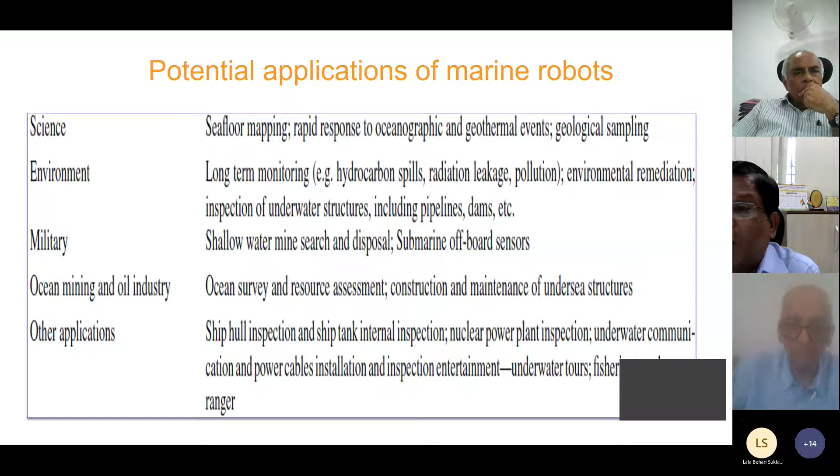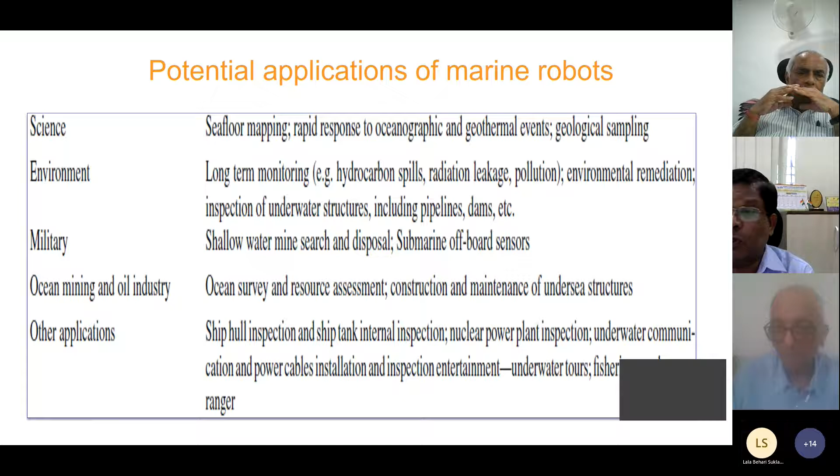There are several military applications, including shallow water mine search and disposal, and submarine offboard sensors. In the mining and oil industry, we have ocean survey, resource assessment, construction and maintenance of undersea structures. Other applications include ship hull inspection, tank internal inspection, nuclear power plant inspection, underwater communication and power cable installation and inspection, and also underwater tours and fisheries. With so many applications, the interest from the control, communication and robotics community is growing to focus research on this area.

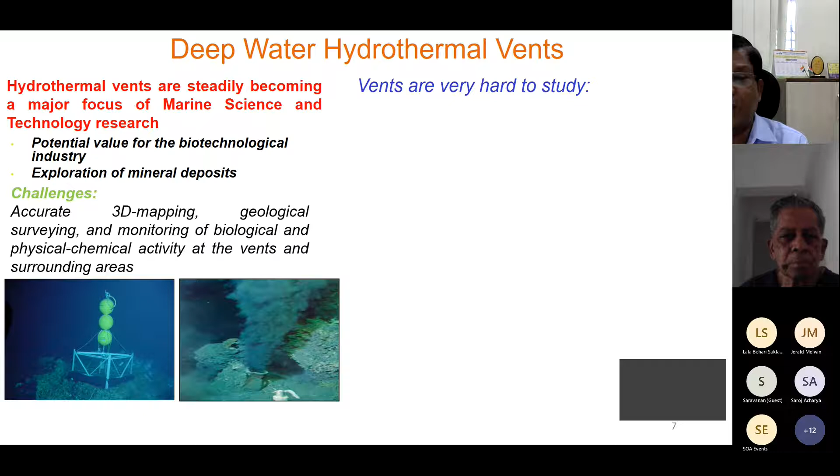But there are certain challenges in this study. For example, how we can map them accurately, how you can pursue the geological survey, and how to monitor the biological and physical-chemical activity at the vent and surrounding areas, and therefore it is a difficult task. If you look at the brine, there are a lot of processes that can happen.

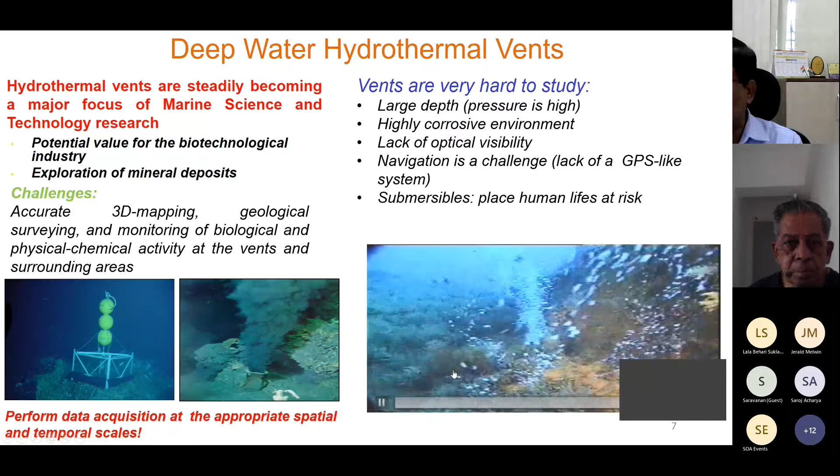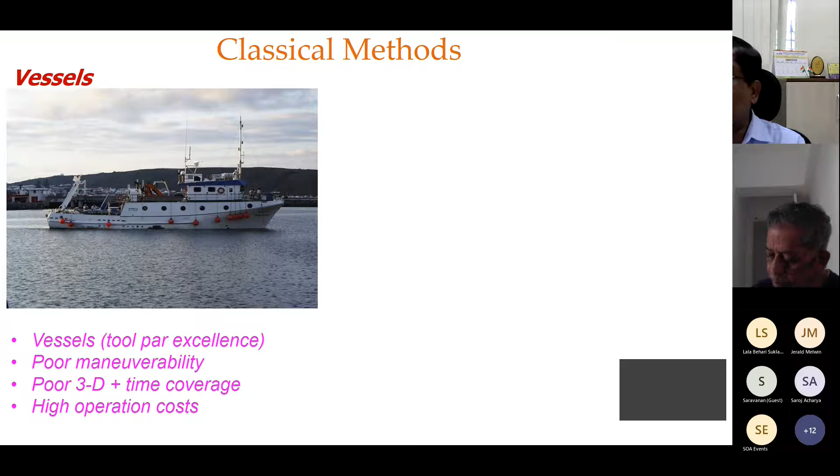And the other aspect is to collect the bacteria, the study on the bacteria, and also gas collection, and to know the details about the gas bubbles. So these are some of the activities of interest at the vents. So usually this is done using marine vessels. But as you know, these marine vessels have poor maneuverability, the coverage is less, and they involve high operational cost.

On the other hand, we deploy divers for the purpose. But as you know, divers are also restricted. They have restricted coverage, it sometimes becomes dangerous, and it becomes difficult to collect georeferenced data through the divers. So therefore, there are a lot of technical challenges for these tasks, and particularly we need to study the sensors and methods that we want to develop for marine data acquisition, signal processing and data fusion, and how to disseminate this information.

So therefore, there is a need for advanced technology, and that technology involves how to employ autonomous underwater vehicles, autonomous surface vehicles, gliders, submersibles, or vessels for these tasks. So after these vessels, slowly the movement happened to develop remotely operated vehicles. But these remotely operated vehicles have an umbilical cord, so they are not truly autonomous.

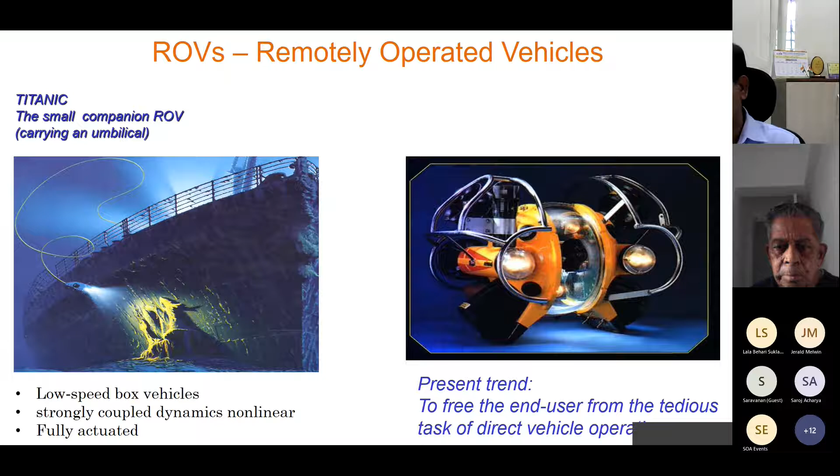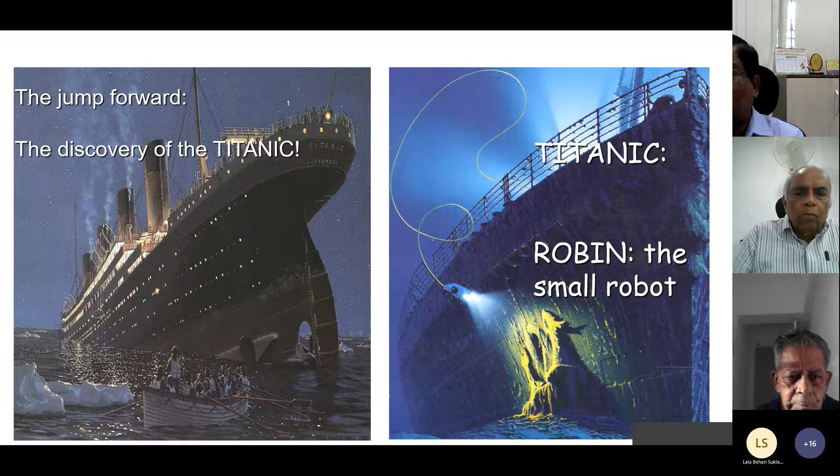So you can control them from somewhere else, and it is fully actuated, meaning the number of degrees to control and the number of actuators involved are exactly the same. So all the degrees of freedom are easily controlled. So it is easy, but still not autonomous, and it is very tedious to control them remotely. So the next step is how to remove this control from outside and make it truly autonomous. So the new trend is to develop autonomous underwater vehicles, where we want to remove this umbilical cord of the remotely operated vehicles.

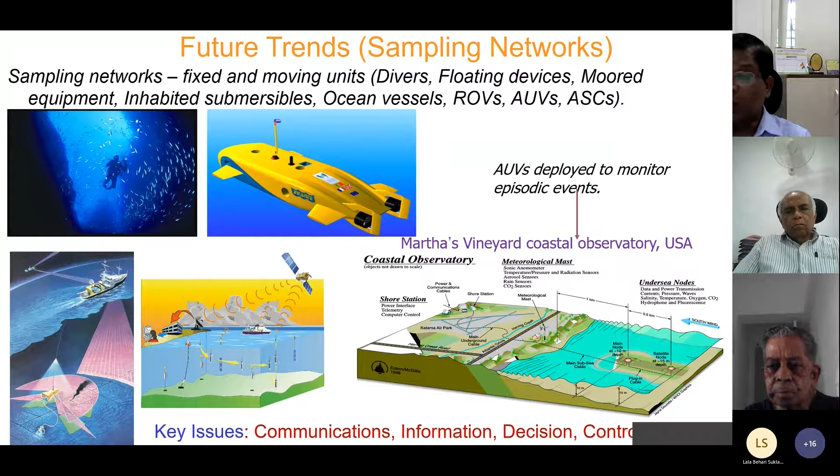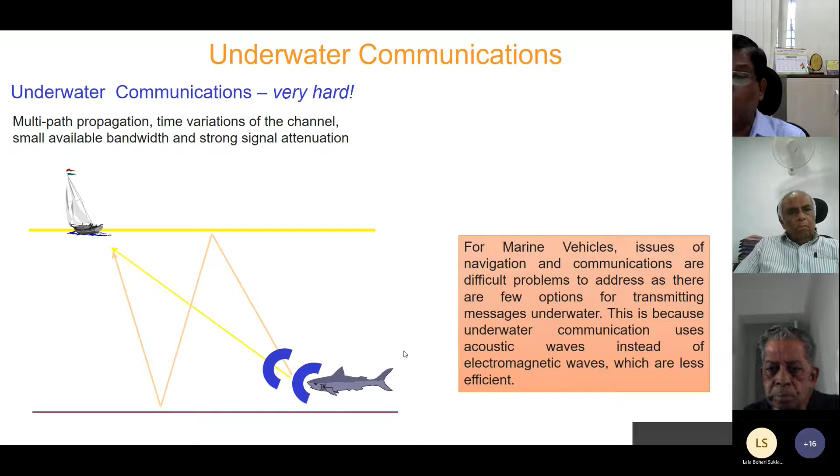So the communication, why it is an issue: as you know, in the underwater medium communication is very difficult because of the multipath propagation, the time variation of the channel, the low bandwidth and the low data rate. So therefore, for marine vehicles, the issue of navigation and communication is difficult to address. So when we design a control, we must look into these communication aspects.

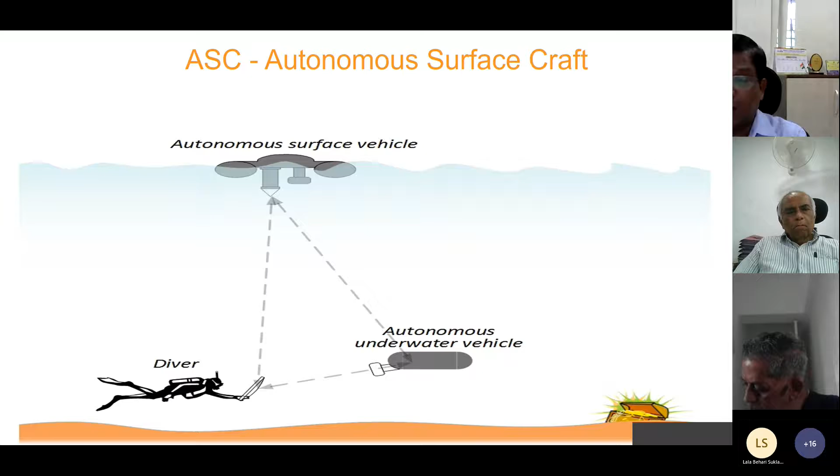So as far as the future vision for these marine vehicles is concerned, like the autonomous underwater vehicle, we can put the surface vehicle along with the underwater vehicle and diver in a complete loop. So what we can do is set up a symbiotic link between the human diver and a set of autonomous robots, the underwater vehicles or the surface vehicles. Now we can develop a multi-component, highly cognitive robotic system that can easily gather the data and interpret the data, and we can use it substantially at a later stage.

So now the key motivation is how we can ensure the diver safety and how we can achieve the underwater operation, and we can also go for several missions like the surveying of the seabed or some of the underwater mission plans.

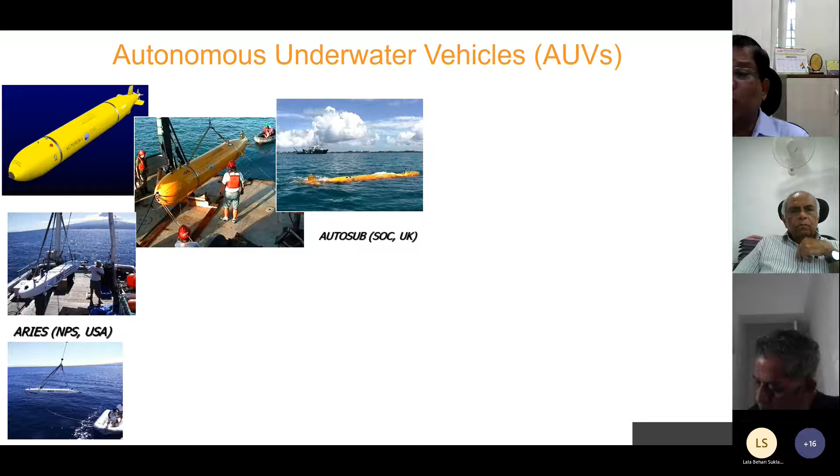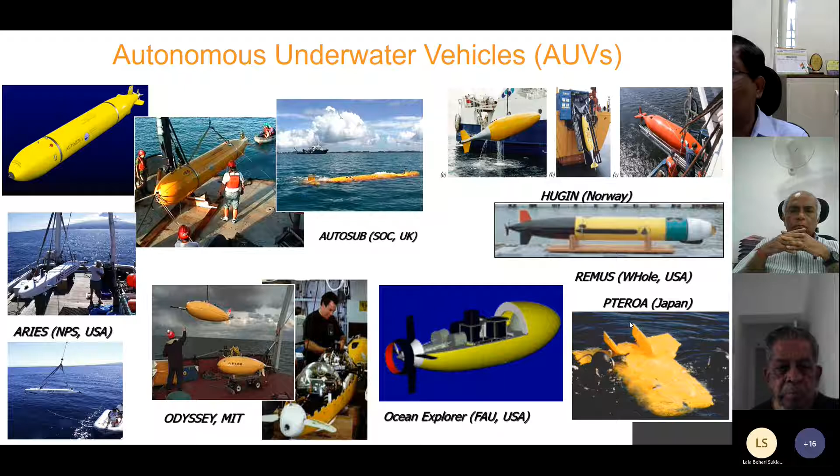So for autonomous underwater vehicles, a lot of research has happened in recent years. As you can see, this is the development in the US, this is ARIES, and this is MIT. They have developed an underwater vehicle called Odyssey, and this is again by the US. In the UK this is Autosub, and in Norway they are developing a lot of underwater vehicles, called Hugin. Then this is Remus, again in the US, this is the PTEROA in Japan, and this is the Marius AUV, developed again in the US.

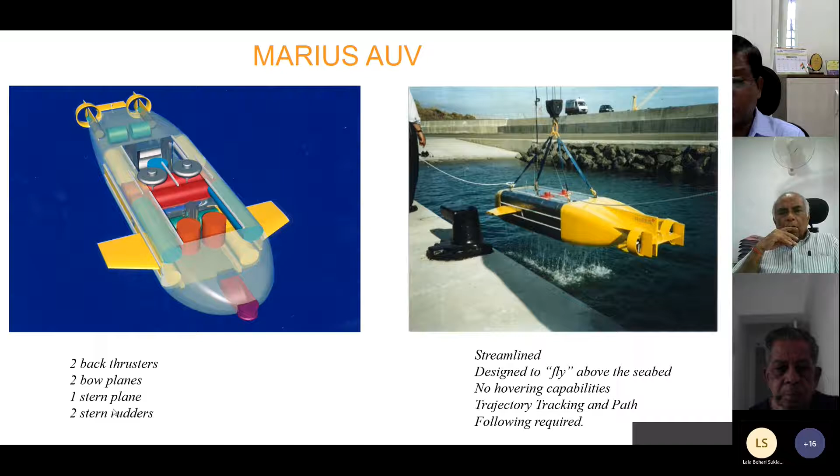And in India we have a couple of systems developed: CMERI Durgapur has developed one, in Rourkela we developed two, and in Kharagpur also they are attempting some AUV development. All these AUVs, as you can see, are propelled through thrusters, and they are capable of trajectory tracking and path following without any difficulty, because we can have both bow plane as well as stern plane control.

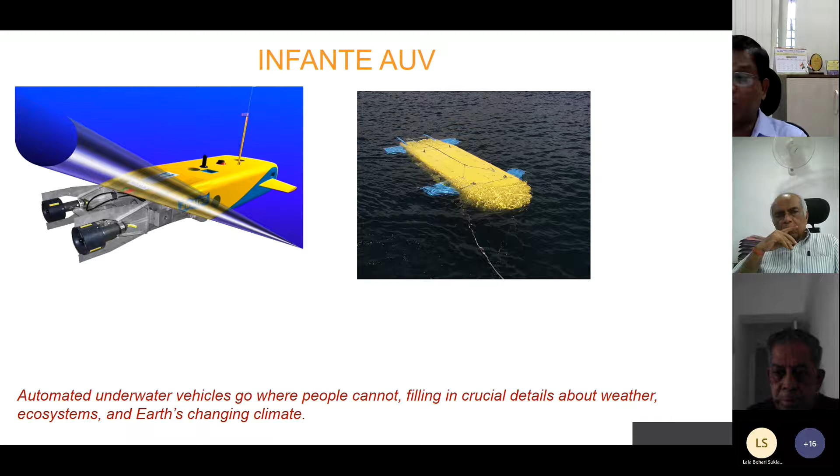So this is a very popular AUV, the autonomous underwater vehicle, which goes wherever people cannot, and we can do a lot of weather data collection and gather other information by using this AUV. These AUVs are supported with thrusters, sterns and rudders, and they are easily controllable for accomplishing a trajectory tracking control or a path following control task.

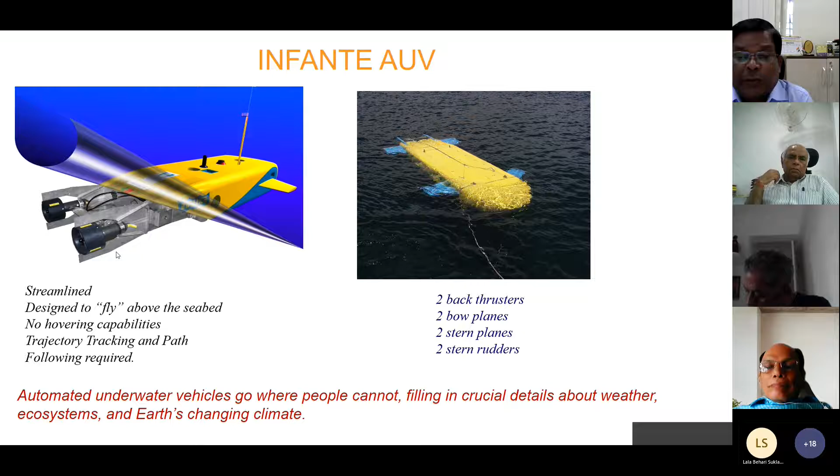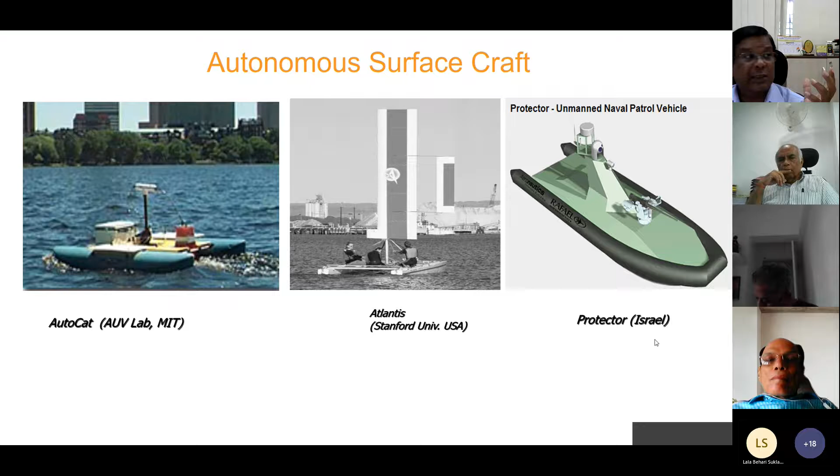This again was developed in the AUV lab at MIT, this is in Stanford, and this is in Israel. So a lot of development has happened in autonomous surface craft and their course control. But the problem here is how to control these surface vehicles, the ASC or autonomous surface crafts. The whole problem is the sea waves, the ocean current, the wind gusts, and therefore a suitable design of the path following control or trajectory control is essential here.

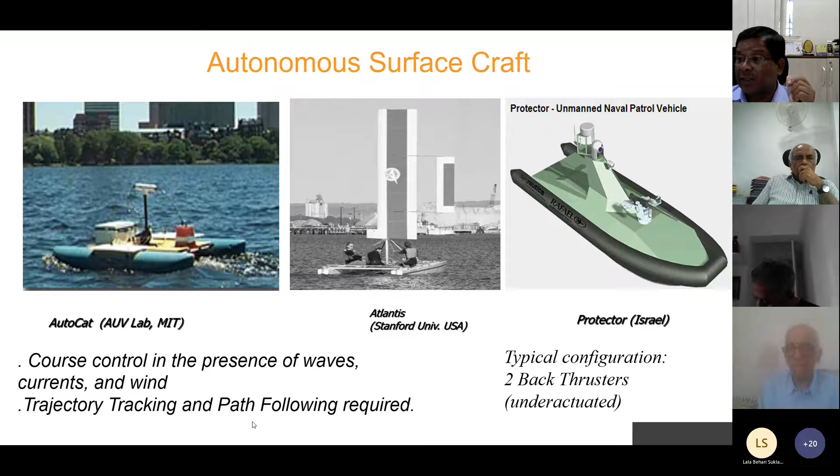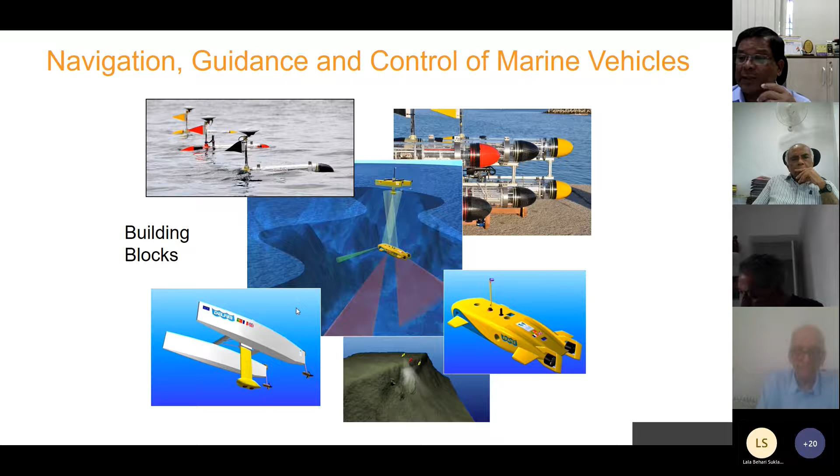As I mentioned earlier, some of the variables of interest are measured using sensors, and wherever it is not possible, we can use observers to design the controller. This navigation task is to direct the marine vehicle by determining its position, attitude, and course, and then figure out how it can navigate.

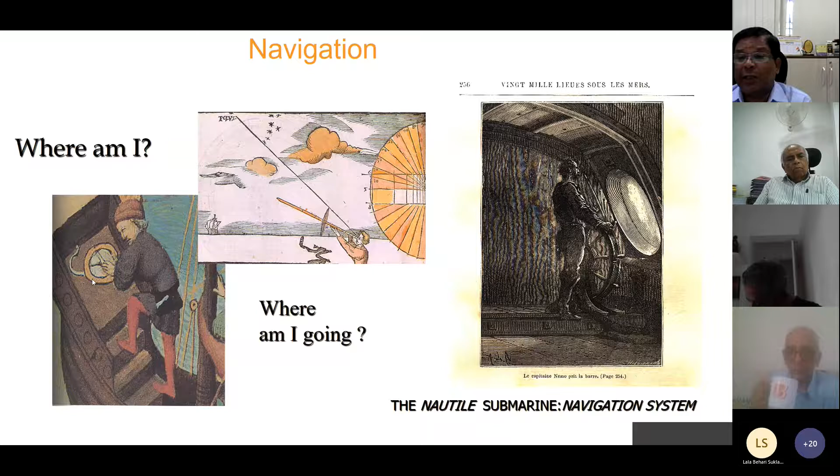So basically, what we understand by navigation is: where am I? Currently I am here, and I should know where I should go. So this aspect is basically navigation.

In terms of these marine vehicles, we have different variables involved, like different linear positions and orientation. We need to know about different transformations of the coordinate frames, like the body reference frame to any other reference frame. So we have to convert it to the kinematics, and then find the suitable control to achieve this desired orientation or desired position.

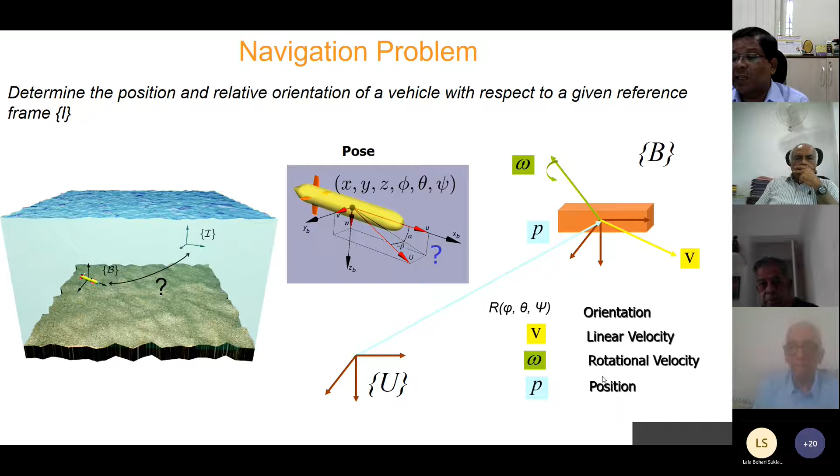So the navigation system needs to be designed using different navigation algorithms, and this necessitates different variables like linear position, linear velocity, orientation, and rotational velocity of the marine vehicles, measured by some sensors for this purpose.

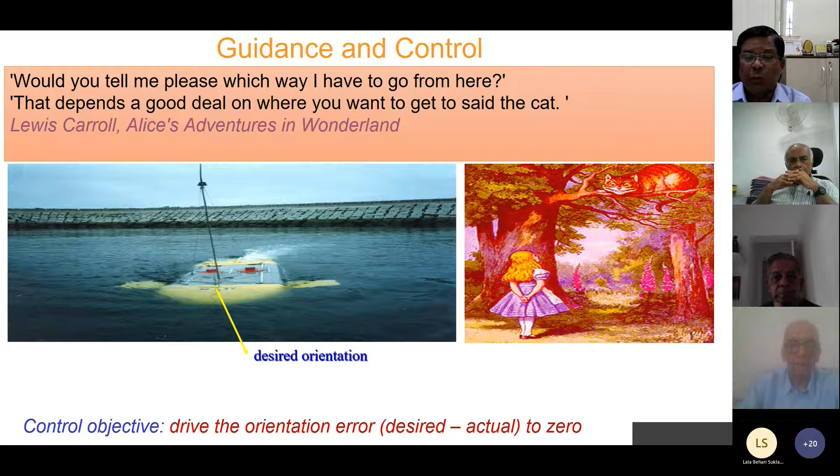So the guidance and control problem: basically we want the desired orientation, and this is the actual orientation. Our objective is that this error, the desired minus actual, should be 0. That is the objective.

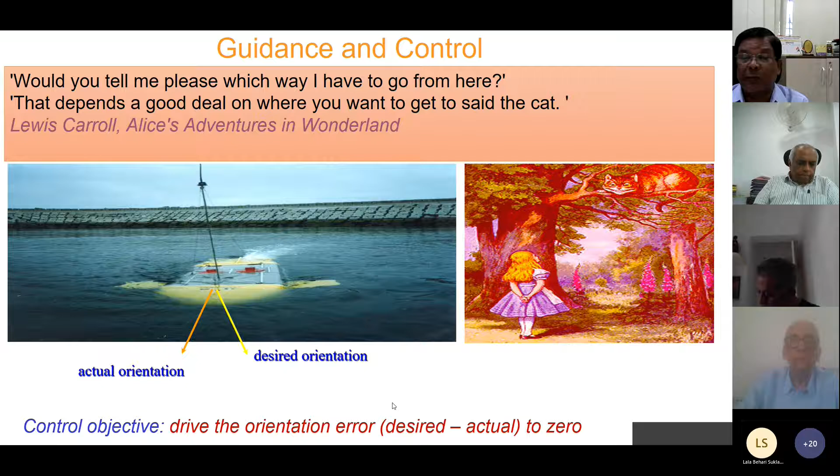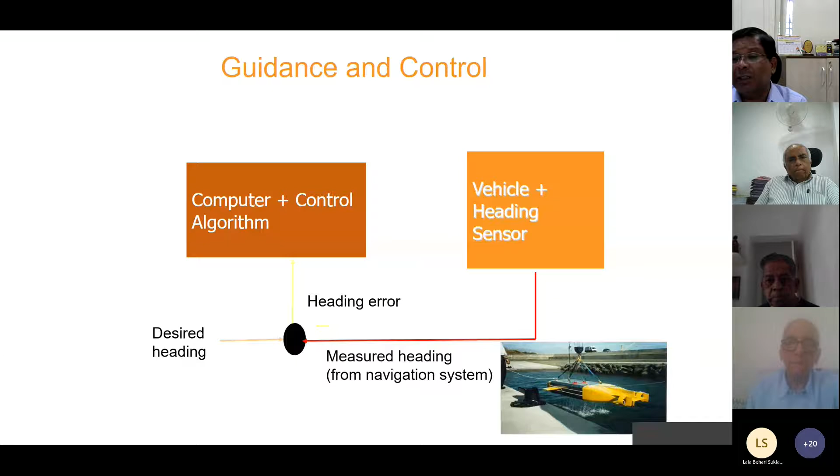So how do you achieve this? That can be achieved by suitable control design. This control algorithm that you design must be put in a digital platform, and then the respective stern or rudder of the marine vehicle would be given the appropriate control signal to change the voltage of this stern or rudder.

Thereby you can control this heading, or for this navigation, you can have either a heading or a diving motion for a particular marine vehicle.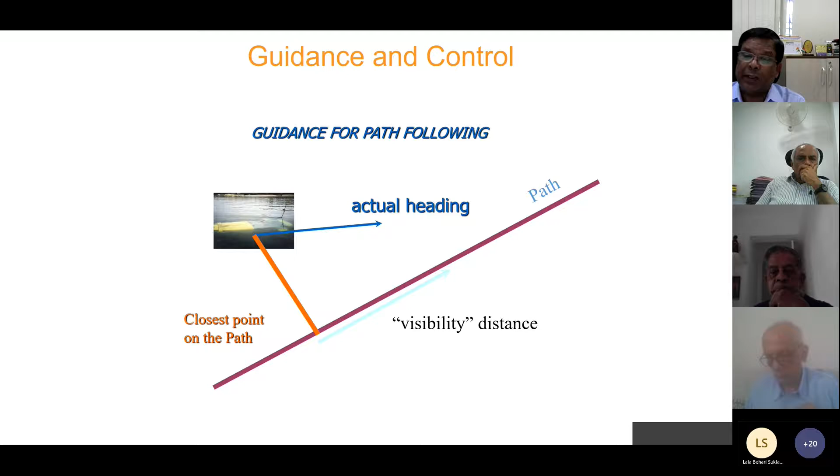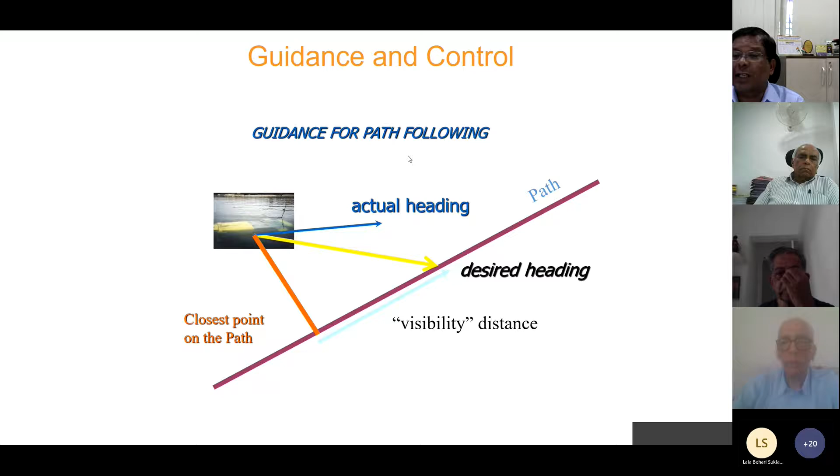So we can have this path following control, meaning it is a single path trajectory control, where the actual path or actual heading is compared to the desired heading. So there is a visibility distance, and the objective is how to achieve this desired heading across the path. We must design a suitable path following control to achieve this.

This mission control for these marine vehicles necessitates different sensors, navigation algorithms, and control, and how to implement them in a computing environment, and then how to generate the appropriate propulsion through the actuators, so that the vehicle can navigate to a desired orientation, a desired path, or a desired heading.

So this is typically an AUV structure if you look at it. The AUV could be propelled either through a thruster or a stern, and this is a very typical figure of an AUV, where this portion is called the nose portion, this portion is called the hull, and this is the tail portion.

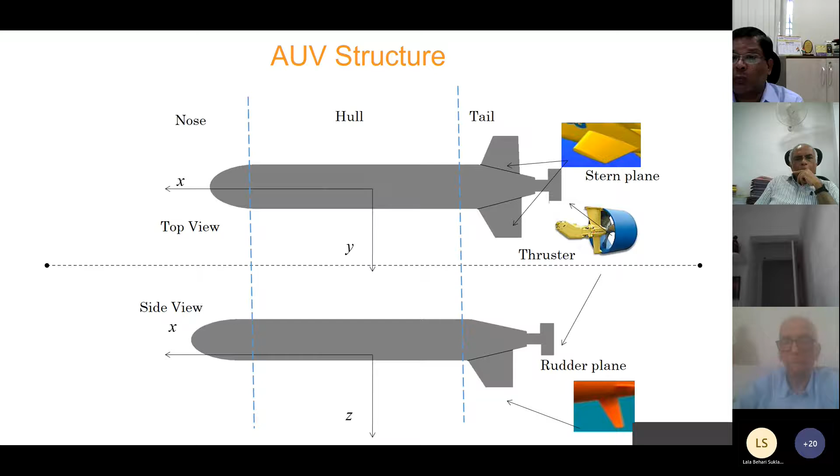So what exactly do we want? We want to control an AUV when there are disturbances, ocean currents, and all these uncertainties present. So how do we design the suitable path following control for an autonomous underwater vehicle?

Therefore we need adaptive controllers, since a fixed gain controller is not appropriate here. So what exactly do we want? We want to develop some adaptive controllers.

As we know, adaptive controllers have gains that are adjusted depending upon the change in dynamics of the plant. So our objective is to design an appropriate adaptive controller so that in case of any uncertainties or disturbances, the controller gains are adapted based on the estimated or identified dynamics at every sampling time. The task is to estimate the plant parameters and states online, and thereby design a control algorithm that facilitates adaptation of the controller gains.

As I mentioned earlier, marine vehicle control has several challenges. The challenge is basically in the communication - the data rate in the underwater medium is very slow, and sometimes there is data loss as well. So we must design a control under this communication constraint, and there is communication delay as well.

So how to take care of that communication delay in designing an appropriate control, and also the disturbances like wave disturbances, and there could also be the dynamics of the AUV or the marine vehicle dynamics to consider.

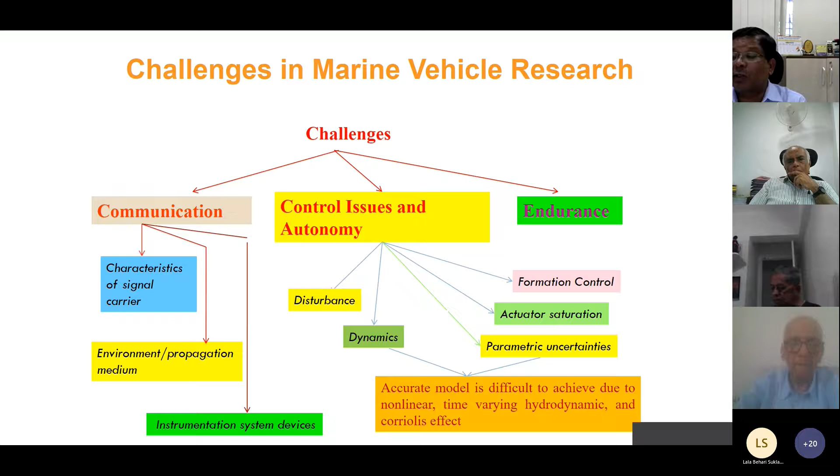There could be some parameter uncertainties and actuator saturation, and this problem becomes more amplified when you employ a larger number of AUVs for difficult applications, and we also need to ensure endurance. So one controller of interest that we designed for this underwater vehicle is an adaptive controller that basically identifies the dynamics of the underwater vehicle.

This is done by modeling the dynamics through a NARMAX model, meaning Nonlinear AutoRegressive Moving Average eXogenous model. Unlike the ARMAX model, here polynomial parameters are involved. Since the autonomous underwater vehicle is a very complex system, its dynamics are truly nonlinear, so we must capture this nonlinear dynamics appropriately.

As discussed earlier, the adaptive controller is implementable when you can know how the dynamics changes at several sampling times. So at every sampling time, we identify the NARMAX dynamics, and thereby design an adaptive controller. The controller we design is a self-tuning controller, which is one class of adaptive controller.

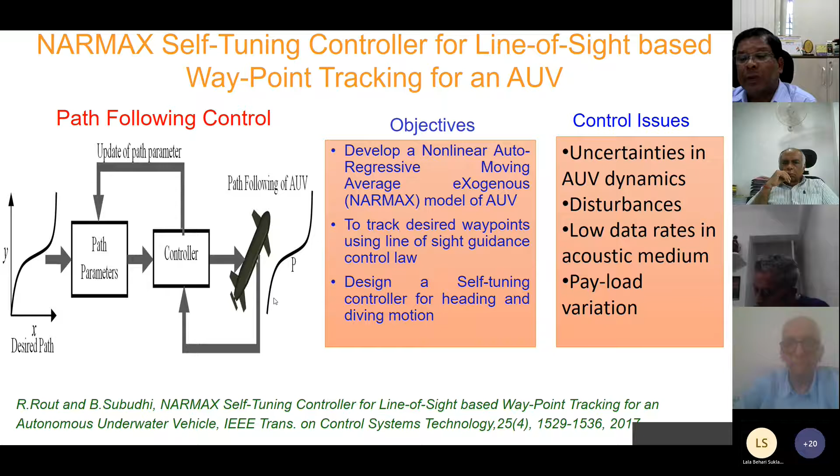The approach we employed is a line-of-sight approach, where we provide a set of waypoints for tracking across a path. The problem for path-following control is that we provide the path information, and our objective is that the underwater vehicle or marine vehicle must follow the desired path. To design that control, we must know the kinematics.

In the kinematics, we have different degrees of freedom, like linear velocities, angular velocities, and orientations. These degrees of freedom include surge, roll, pitch, sway, and heave. We transform these variables from the earth-fixed frame to the body-fixed frame through suitable transformation using matrices J1 and J2.

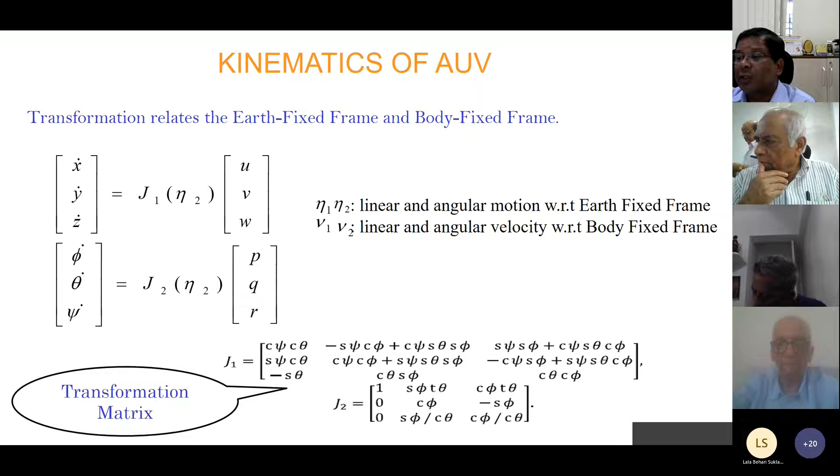So these kinematics are useful to operate the control in the body-fixed frame. What we basically intend to do is identify the nonlinear dynamics of the underwater vehicle at every sampling time using an appropriate system identification technique. So what we do is consider the system.

The system here is the underwater vehicle, and we choose different inputs and a set of outputs, u and y, along with z to the power minus 1 terms. These represent the lagged time delays, and this past information of input and output of the AUV, that is y from k minus 1 to k minus m, and control inputs from k minus n sampling instants.

These informations are used to identify the mapping between the input space and the output space. The problem turns out to be a nonlinear function approximation problem, and our whole objective is to identify this function f. If we can map the input-output information at every sampling time, we can easily identify the dynamics of the AUV, or in other words, identify the NARMAX model of the underwater vehicle.

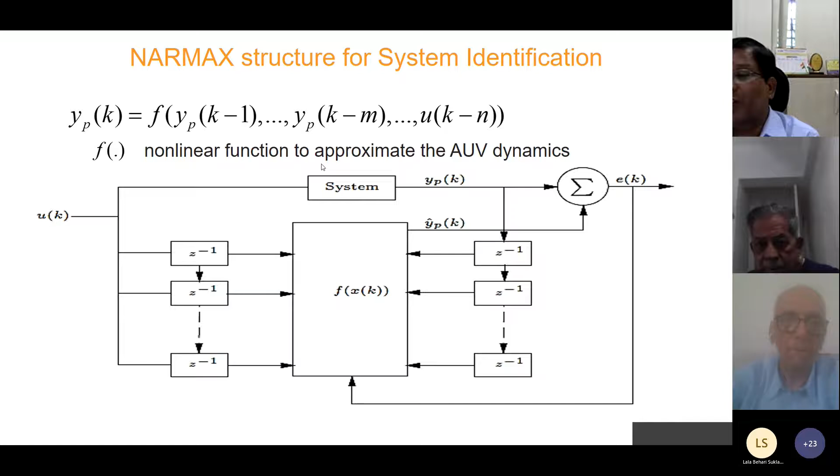Our interest is to control the heading motion as well as the depth motion. The heading motion involves the sway motion and yaw motion, that is the velocity and position, and the depth motion includes the heave motion and pitch motion, that is W and Q. Using these variables, we identify the NARMAX model of the autonomous underwater vehicle, which we subsequently use for path-following control.

So what we do is choose a model structure, the NARMAX model structure. This is for the heading motion. We choose the output, and the input is the rudder.

So basically the purpose here is to identify two dynamics. One is the heading dynamics involving the sway motion and the yaw motion, that is V and R, and the depth motion basically involving the heave motion and pitch motion involving W and Q.

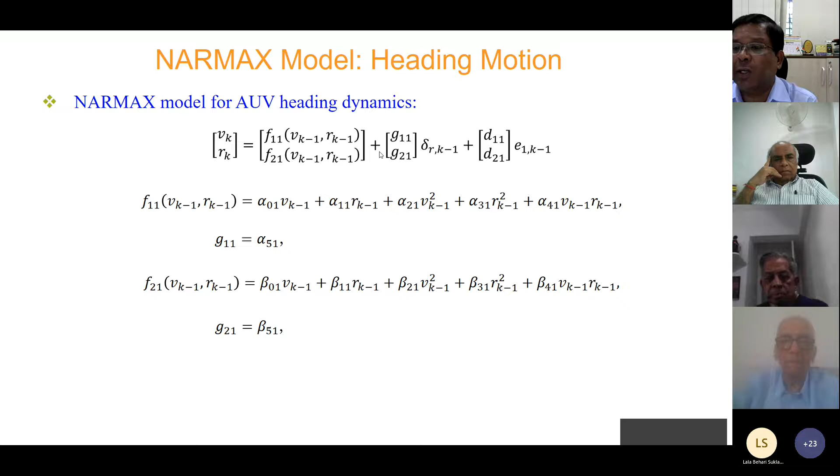Our purpose is to identify the Narmax dynamics of the AUV for the heading motion. So V and R are the outputs, and the rudder plane actuation is the input, and this is the modeling error, and we choose these polynomials f11, f21, and g11, g21, which are the different constant terms in that polynomial.

For the depth motion identification, we choose W and Q as the output, and the stern plane actuation is the input signal, and this is the error signal. f12, f22, g12, g22 are the polynomials that describe this Narmax model.

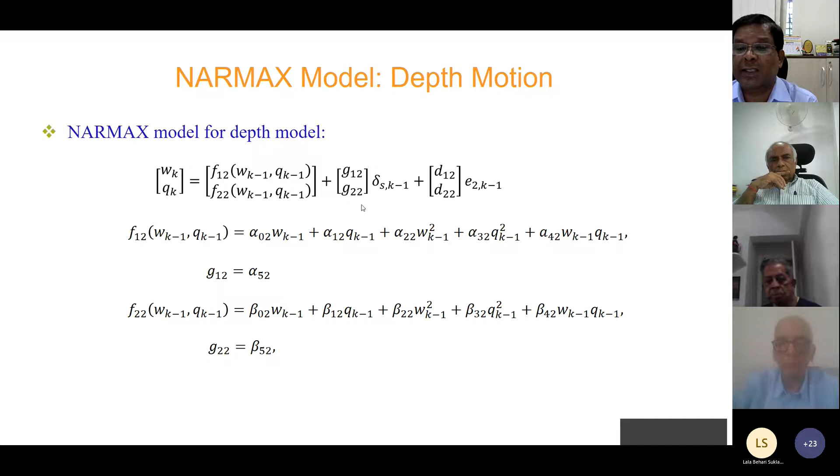Our purpose is to have a faster path following control. For this path following control, we consider waypoint tracking, so we define different waypoints x1 y1, x2 y2, x3 y3, and x4 y4. For every waypoint we also prescribe the region of acceptance.

Then we consider a line of sight guidance. That means if you consider two waypoints, for example the ith waypoint and i-minus-1's waypoint, and connect them by a linear approximation, then our purpose is to track this linear path. This is called waypoint tracking using the line of sight guidance. Of course, we must also consider how to avoid obstacles.

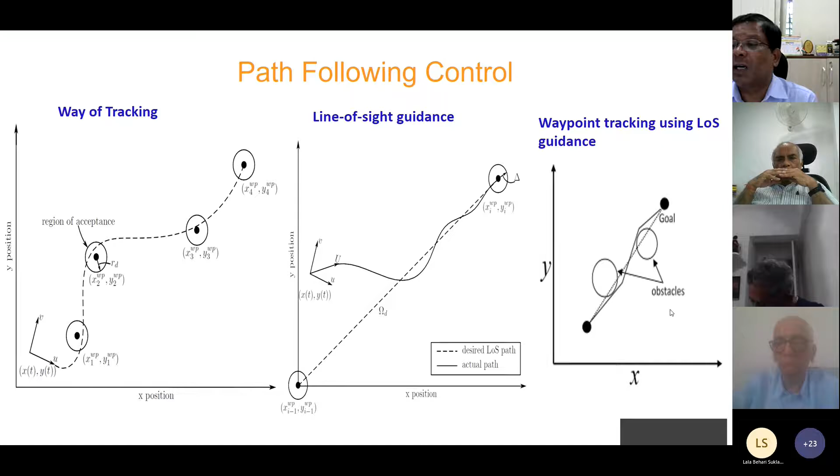Now coming to the design of the adaptive controller, what we have done is define this desired path through the different waypoints, and we adopted the line of sight guidance control principle. Then what is our objective?

We first design a dynamic controller. For this dynamic controller, we have the rudder plane input and the stern plane input, and these are the different outputs: heave and sway motions, W and V, Q and R. For these two motions, delta R with V,R and ds with W,Q, we identify the heading and diving motion Narmax models.

Based on these identified models, every sampling time the controller gains Kp1 and Kp2 are adapted. Then we design a kinematic controller so that we can transfer from the inertial frame to the body frame.

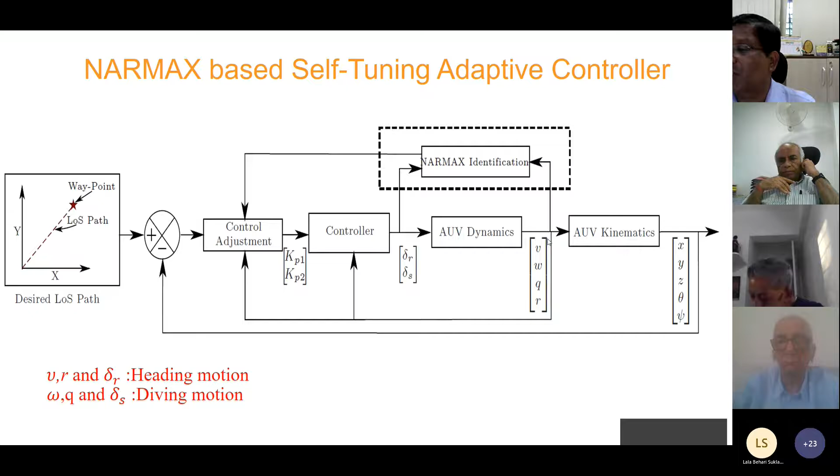In the identification of this Narmax model, we write the regressors for the model, for two motions: the heading motion and the diving motion. We employ a least square estimation, called recursive extended least square estimation technique, to identify the parameters of this Narmax model, like the constants mentioned in the polynomials.

This is the very popular RELS algorithm, called the recursive extended least square algorithm, where these are the previous sample instant parameters and the current instant parameters. These are the updates, and we have the covariance matrix, and this is the covariance matrix update.

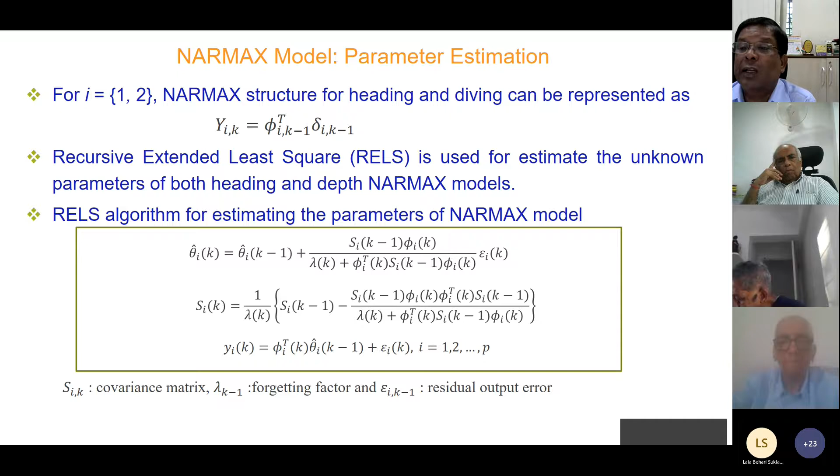We have the observed variable y, and we have the residual error, and phi is basically the regressor. Using this method, we can find the unknown parameters, and thereby every sampling time we are ready with the Narmax model for these two motions we are interested in.

Now to design the kinematic control, our purpose is to reduce the error. So we choose an objective function v1 that involves these two errors, one for the heading motion and one for the diving motion. Here we have chosen two positive definite matrices R and Q, which are the weight matrices, and our objective is to minimize this error.

So the error objective function is set by substituting these values: you represent ek, calculate ek and E transpose k, and similarly dk and D transpose k in terms of the different parameters, giving the objective function in this manner. Then we define these different errors, what we call the cross-track error, which involves the path parameters and offset from the desired path. This is dk, meaning the cross-track error.

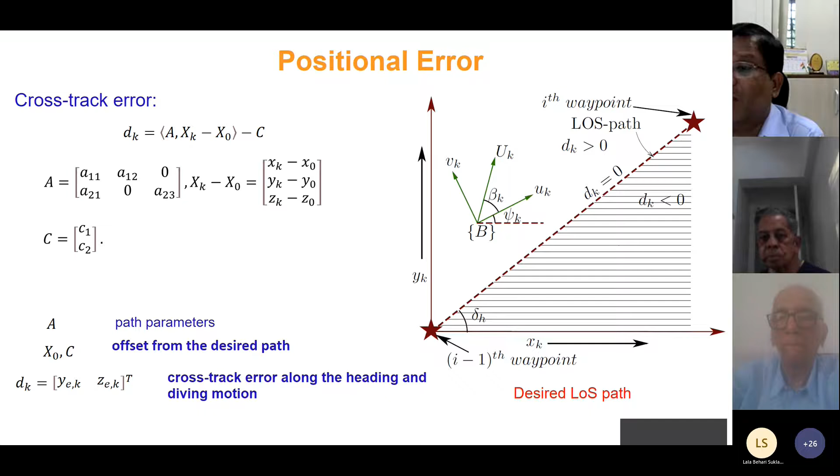So our objective is to bring the dk to 0, and these are the different waypoints we prescribe, like the i minus 1 waypoint and the ith waypoint, and we adopt the line-of-sight guidance control principle to accomplish this path following control.

So once we do the kinematic controller, our next agenda is to design the dynamic controller, where, as I told you earlier, we have two control inputs, delta, the rudder plane and the stern plane, and these are the corresponding inputs, and these are the gains Kp1 and Kp2 that need to be adapted. So these are the dynamics for the heading dynamics and the depth motion dynamics.

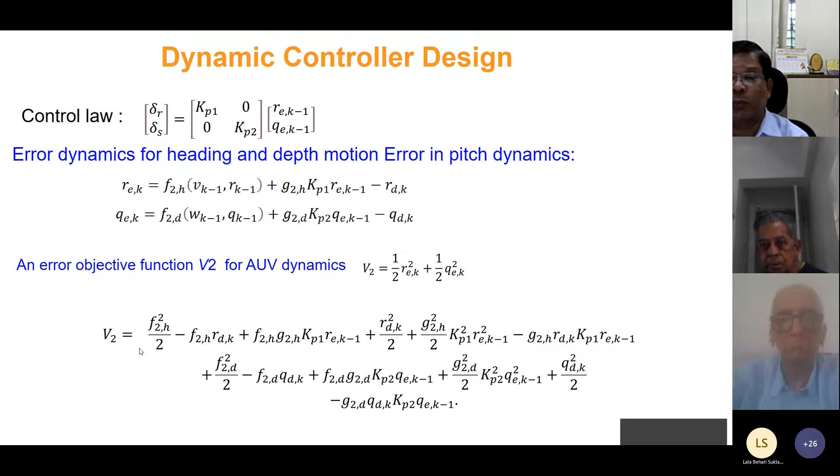And then we consider V2, another objective function that comprises the error in the heading plane and the diving plane. If you put these values of R and Q, after substituting these values, you get the expression for V2 here, the objective function. Now our total net error objective function becomes V1 for the kinematic controller and V2 for the dynamic controller.

So then our purpose here is to minimize this objective function, of course with certain constraints. What are the constraints? As I told you earlier, the constraints are basically with respect to the actuator saturation and with respect to the gain that we would like to take. And these are the Q matrix and C matrix we calculated here. And this X involves the R and Q, the position and these velocities, and also the gain of the controller.

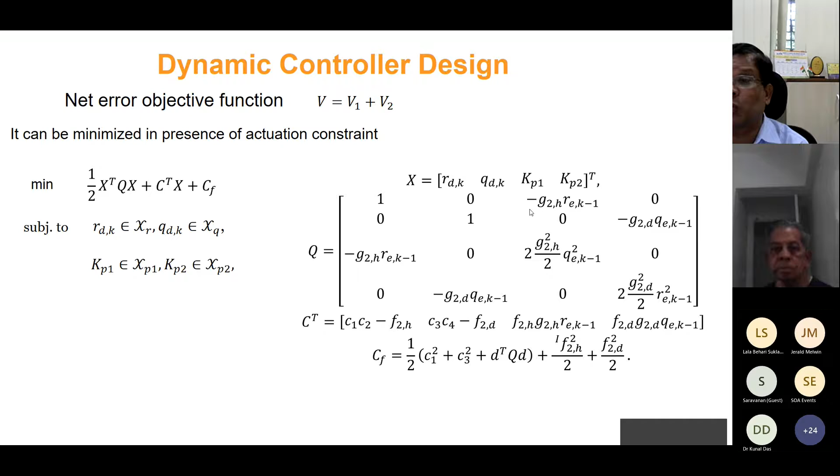So we perform a simulation to see whether our controller is able to do proper path following control. For that we choose a sampling time of 0.5 second, and we executed the simulation for 800 seconds, and these are the constraints for the state and the actuators, R and Q less than 1, and the Kp values and the K1 and K2 values less than or equal to 0.6.

And these are the initial states, because, as I told earlier, these are the linear positions, these orientations and linear velocities, and all of them we consider initial values to be 0, and this is our desired heading, we define like that. So then we make a simulation.

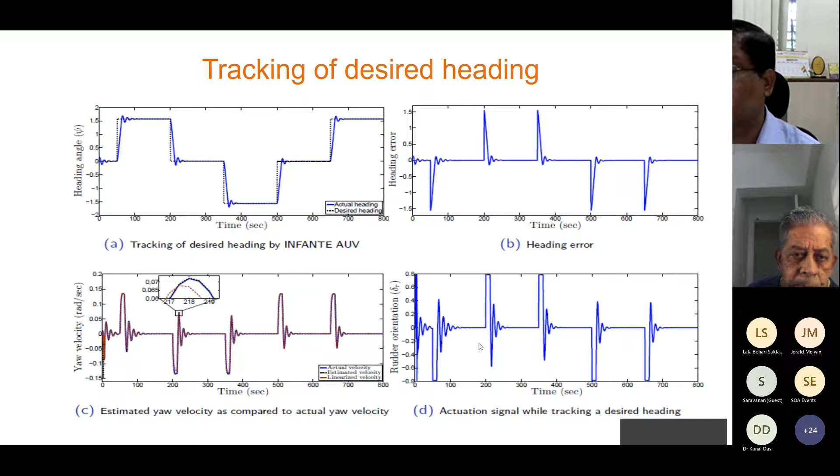In the simulation, the dotted line is the desired, and the blue line is the actual. As you could see, this is for the heading angle control, and the heading error almost goes to 0. And then for the yaw velocity also we could see the estimated yaw velocity curve here, and also the rudder orientation while tracking the desired signal.

So this path following control that we simulated, we want to verify it in real time. For that we developed a prototype autonomous underwater vehicle. We designed an AUV structure, selected the appropriate sensors, and put the batteries here. We have the inertial navigation system, the DC-DC converter for the power supply, different sensors like depth sensor, pressure sensors, the Doppler velocity log, the single board computer, and also the Atmega 2560 for data acquisition, and the single board computer is where we put the control algorithm.

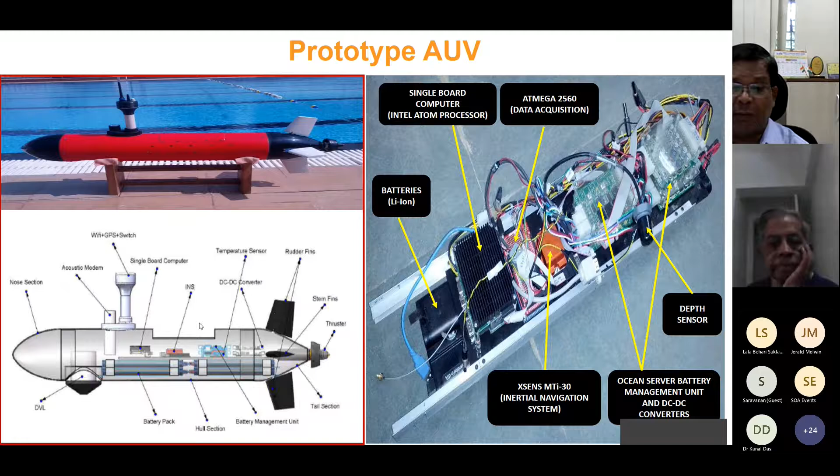So this is the AUV that has been developed in the lab, and this is a little about the different units. We have primarily the sensor unit, computational unit, actuation unit, communication unit, and power supply unit. Among the sensors we employ the Doppler velocity log, INS, GPS, and depth sensor, the computational unit involves the single board computer and the microcontroller, the actuation unit has the thruster and the control planes, and we have the acoustic modem.

Basically the INS gives us the orientation and angular velocity, the DVL, the Doppler velocity log, gives us the linear velocities, the GPS gives us the XY positions, and the depth sensor gives the Z plane motion. And the kinematics we can put here to transform to the body frame. We have the single board computer and the microcontroller, and we have used the Robot Operating System to integrate the sensors, actuators and the data acquisition system. And this is the representation of different sensors and computer nodes for the real-time implementation.

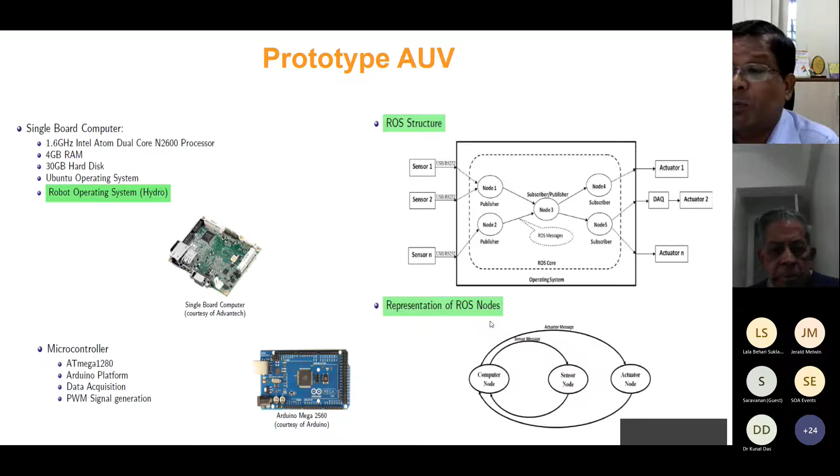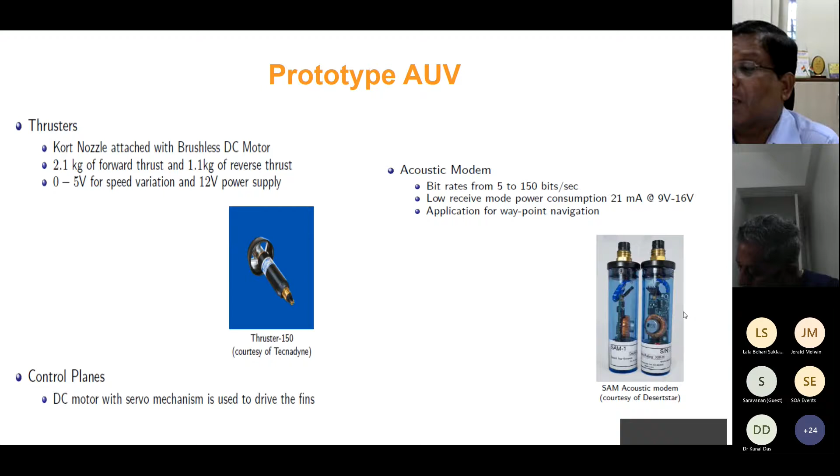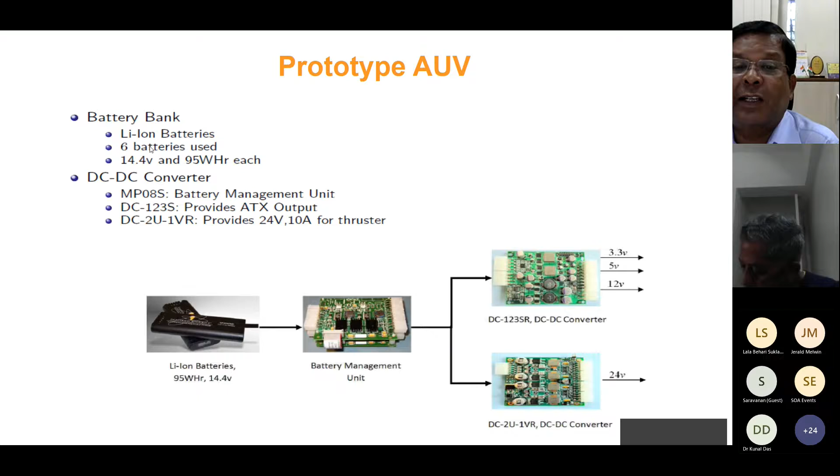And this is the thruster we have used. This is a brushless DC motor, and this is the DC motor. The control plane is a DC motor servo mechanism, and this is the acoustic modem used for the communication. And the power supply involves the battery bank, the same as a laptop battery, like lithium-ion batteries, and a DC-DC converter. And we have the integration of different sensor blocks and actuator blocks to the controller we are developing for this path following control.

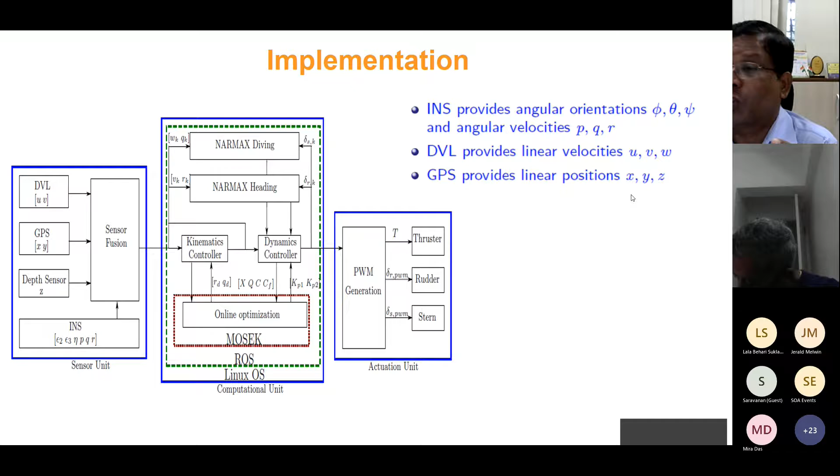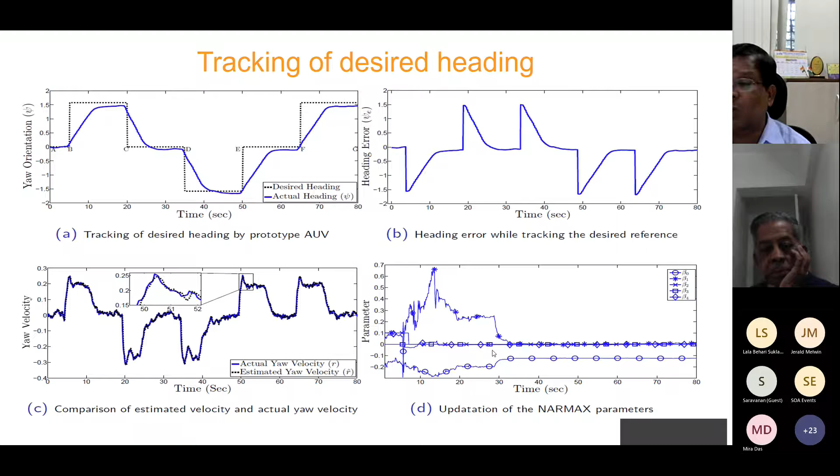Then we implement this path following controller in real time in this prototype. The dotted line is the desired heading, the blue curve is the actual heading, and the heading error goes to 0. And these show how the identification converges to stable values, and these are the updates of the NARMAX parameters, the constants in the polynomial, beta 0, beta 1, beta 2, and how they converge to constant values.

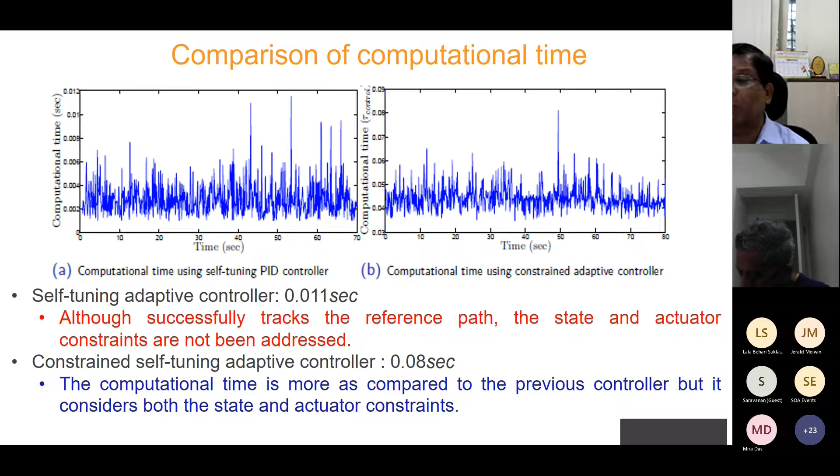If you see the computational time, by choosing the constrained adaptive controller, where instead of identifying all the polynomial parameters we use only the effective polynomials, the minimal representation, the computation time can be reduced. We verified this in a swimming pool to demonstrate this motion control. So this is for the heading motion. You also verified it for diving motion.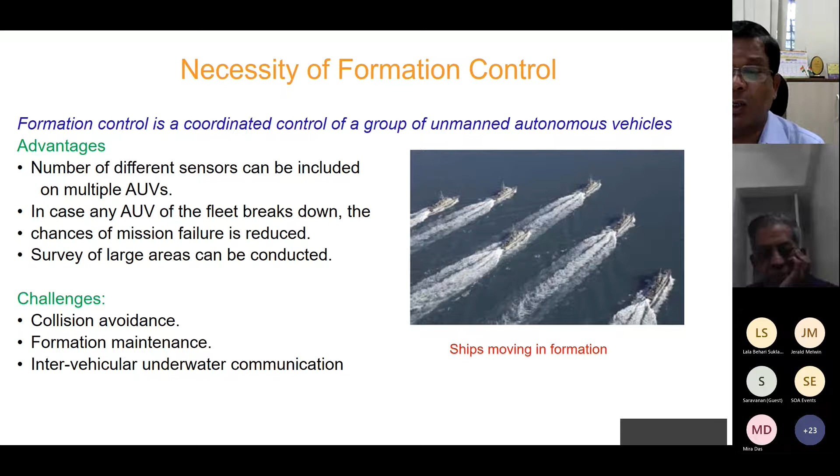But for this task, there are a lot of challenges involved. For example, collision avoidance: even the second or third AUV becomes an obstacle for the first one. Also, how to maintain the distance between them, how to maintain the formation, and how to take care of inter-vehicular communication. Of course, underwater communication is difficult. On top of that, how to maintain communication among these different AUVs.

So if you look at nature, like birds flying in the sky coming to the nest in the evening, they maintain a formation structure. One of the birds behaves as a leader and the rest are followers. This is called formation behavior, the flocking of birds. Similarly, a group of fish maintains a particular group motion where one fish behaves as a leader and the rest are followers.

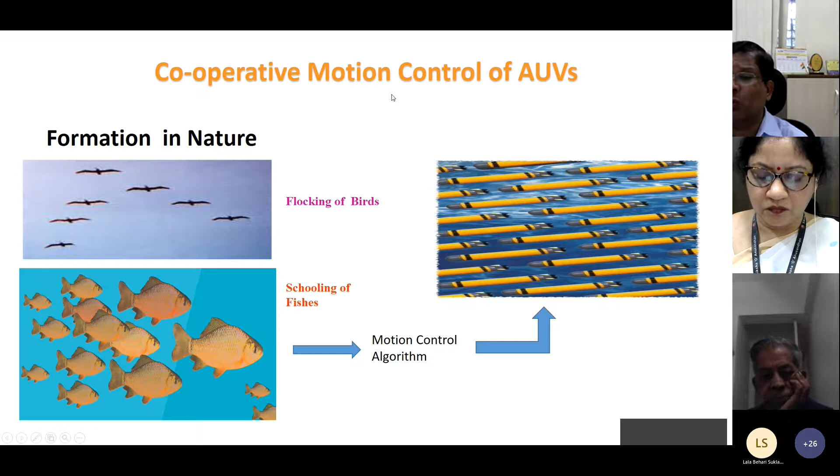So this group motion from nature inspires us to design cooperative motion control, or what is called formation control of autonomous underwater vehicles. In this coordination, you can either include an autonomous surface vehicle, or you can put both AUVs in a loop. The purpose is that they should be in a particular group motion to do some cooperative motion task.

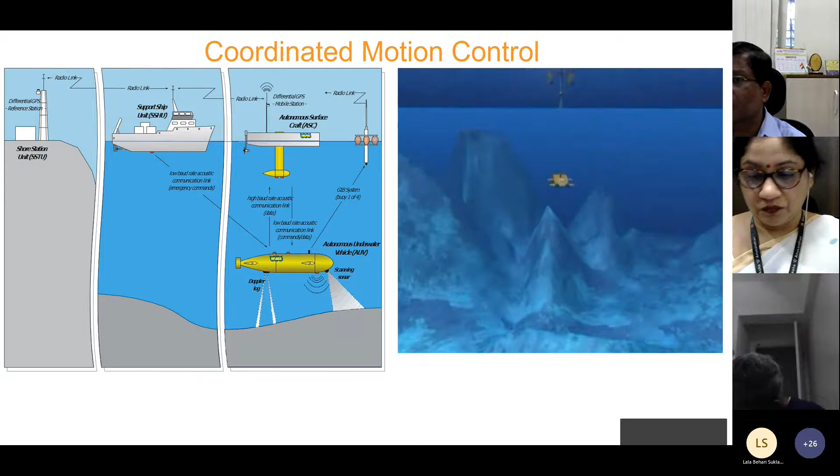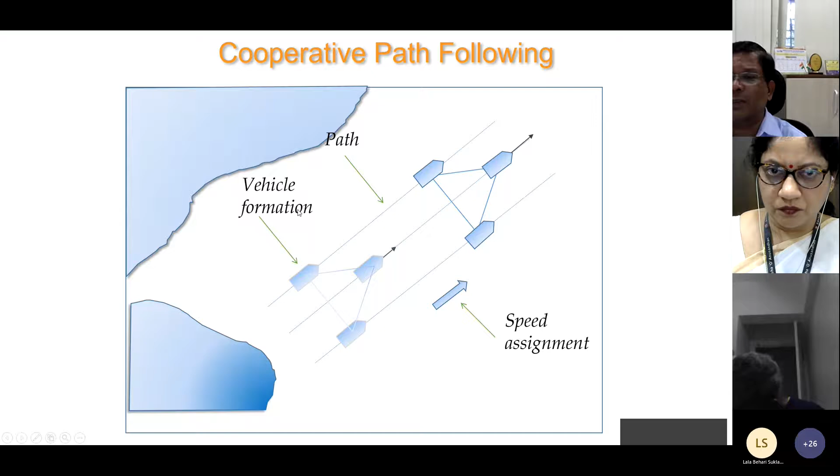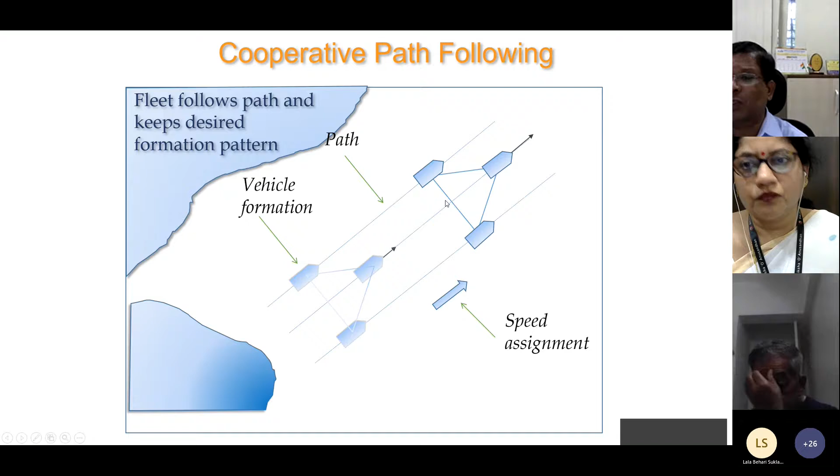So in this group motion, we extend this path following control. Let us imagine that in this path following, we now consider 3 AUVs in a group motion. They are maintaining a formation, a triangular formation. We assign a particular speed that should not deviate, and they maintain a distance in this formation, so that there is no collision. That is the way we go for the cooperative motion control design.

One of the popular approaches is called the leader-follower approach. That means one is a leader and the rest of the AUVs are followers. Either the path can change, or some AUV can change its role during this formation control. But while doing formation control of a group of autonomous underwater vehicles, we realized that there are communication delays, and therefore we estimate this communication delay using a delay estimator technique.

Once we estimate the delay, we extend the previous NARMAX model-based adaptive controller, and the same controller is designed here. Of course, here the kinematic controller is designed using a separate controller called the backstepping controller. Our objective is to have formation control in the presence of this communication delay. So basically, we extend the same method, and consider how the leader states are communicated to the follower states with a delay, and how to compensate for that delay.

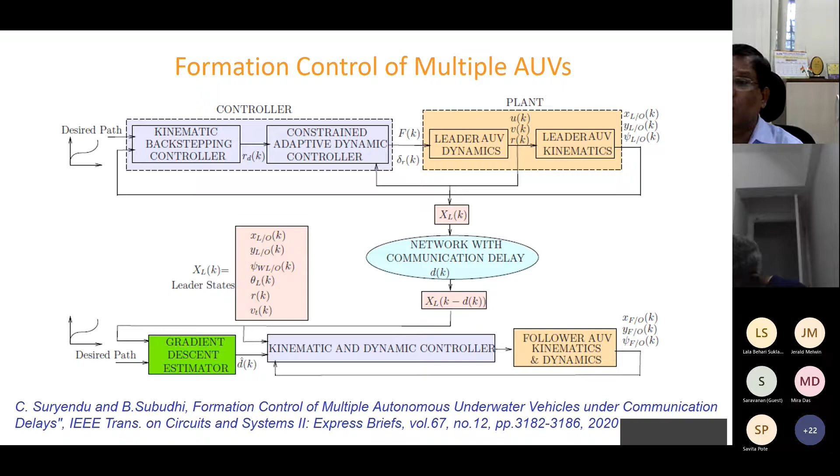We designed this controller, and for simplicity we considered 2 AUVs, because we have only 2 AUVs developed in the lab. We made a study for a circular path where they are following a desired trajectory. This blue line is the desired trajectory, the red one is the leader AUV, and the followers AUV1 and AUV2. We verified different controllers, and we are satisfied that this circular path is tracked with group motion.

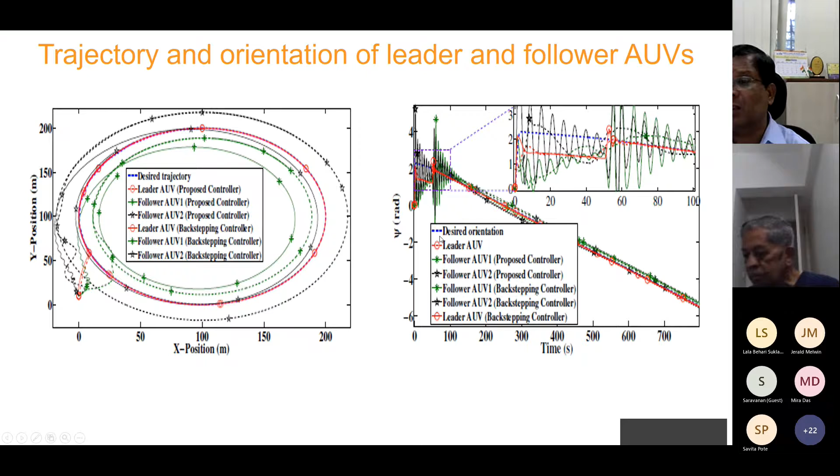And this is the orientation. This is the desired orientation, the red line shows the leader AUV orientation, the green one is for AUV1, the follower 1, and AUV2 is the follower 2, and you could see that all of them are following the desired orientation. Of course, there is little deviation here. For another path, we have chosen a linear path, and all of them are following the desired orientation.

So the conclusion of this work is that we are able to capture the unknown dynamics and also reduce the computation time for the controller implementation. We adopted the minimum representation of the NARMAX model by suitably identifying the significant regression terms, and we identified the NARMAX parameter model using the recursive least-squares estimation algorithm.

We designed the constrained self-tuning controller on the principle of line of sight guidance, and the actuation signals for the stern and rudder planes are generated that comply with the actuator constraints and practical feasibility. The effectiveness of the controller is verified both in simulation and experiment, and we have also seen how they perform with this smaller AUV in a swimming pool.

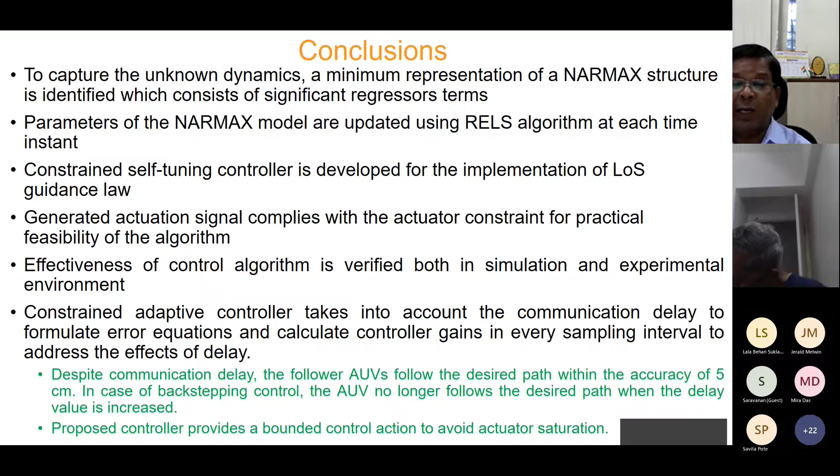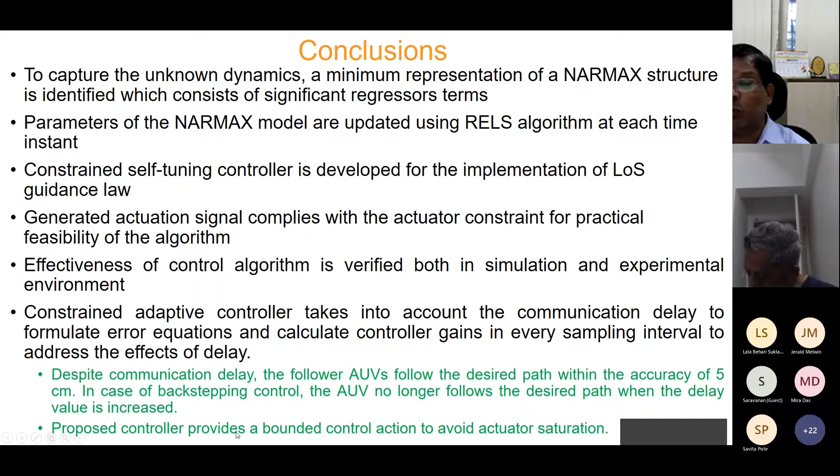With this constrained adaptive controller, we have also considered the communication delay while extending the path following control to a formation control task. Despite the communication delay, you could see that the follower AUVs follow the leader AUV and ultimately the desired path. The proposed control also provides bounded control action to avoid actuator saturation.

Still there is a lot of work we expect to take on as a challenge, like how to design more effective cooperative vehicle mission planning considering the acoustic communication constraints, and also underwater feature-based navigation, online target detection and identification, and data fusion, both magnetic and acoustic.

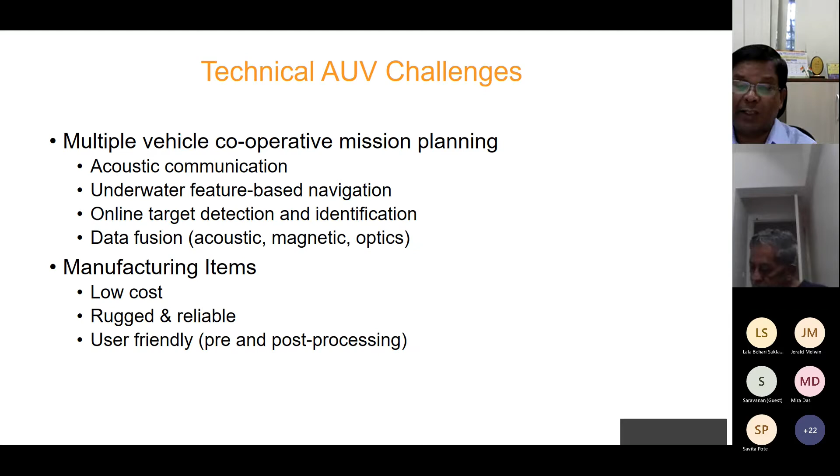And also, while doing so, we must take into account the cost, because one of the challenges here is that when you verify it, many times water goes inside, so the sensor or the computational unit may be lost. So therefore, how to make sure how rugged it is, and how to prevent water coming into the AUV. So that is another task we are also focusing on.

And these are some of the national collaborations. We are collaborating with Goa Shipyard Limited to provide them consulting services on bathymetric profile and seafloor under the ship-lift system and condition monitoring for the ropes used for these ships. And also we are going for the CFD analysis for the hydrodynamic resistance on the ship model, and we are also suggesting to them non-destructive techniques for their ship maintenance.

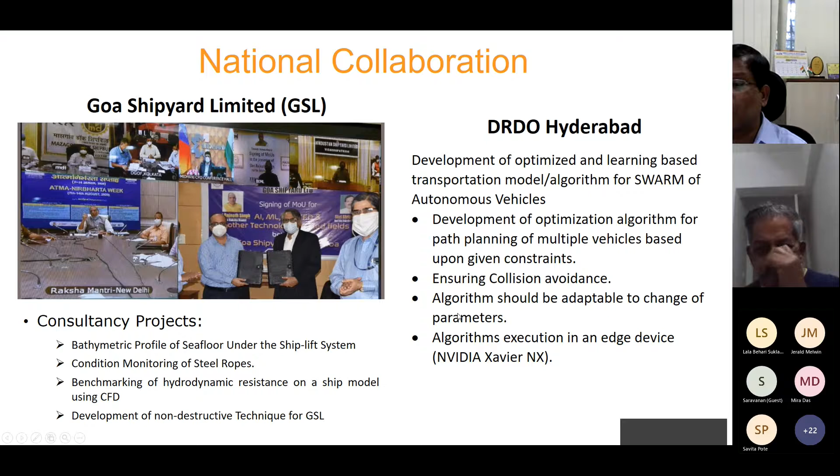And also we are recently providing consulting service to DRDO Hyderabad to design the optimized cooperative or formation control for multiple autonomous underwater vehicles avoiding obstacles, and also how to implement the same on the NVIDIA platform. And these are some of the references used for preparing this slide.

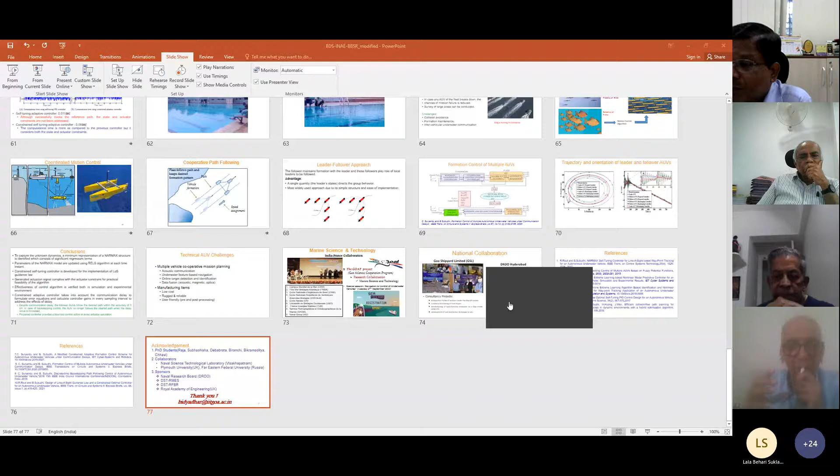I'm not sure whether this question is a valid one or not, but anyway, I will ask. If it is wrong, you can tell me. What I want to know is, this underwater vehicle can be used to hit a target, either a ship or a submarine. Is that right? If so, what will be the ultimate error? Supposing a ship is there, within what accuracy can you hit the ship? They call it an error radius. Will that radius be 500 meters or 100 meters? What is the value for the underwater vehicles you are developing?

Thank you. For us, it is a very small distance. It is only 2 meters for us. Depth is only 2 meters maximum. No, I'm talking about the error radius. See, sir, the ship is there. You want to hit it, probably at the middle of the bow. So how much may your AUV miss it? It may totally miss the ship. So what is that error radius?

Actually, theoretically we have not considered more than that. Only 1 meter. As I said, the maximum region we have considered is a 1 meter radius. And in the swimming pool, of course, there is a practical limitation. We have taken a little less than that. Okay, so at some point of time you will test this, because in the sea there can be very big waves, or something moving both the submarine and your AUV. Both can move from their path.